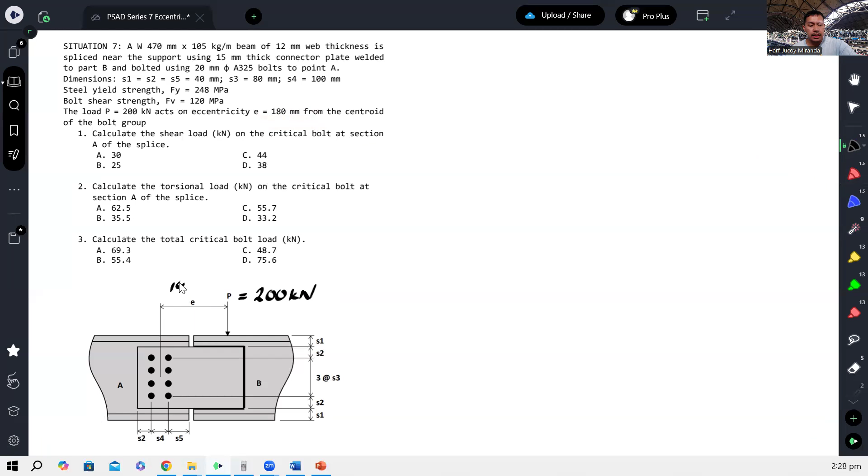Okay, so the load is 200 kilonewtons and then you are given eccentricity 180. So ito daw ay 200, and then this is 180 millimeters.

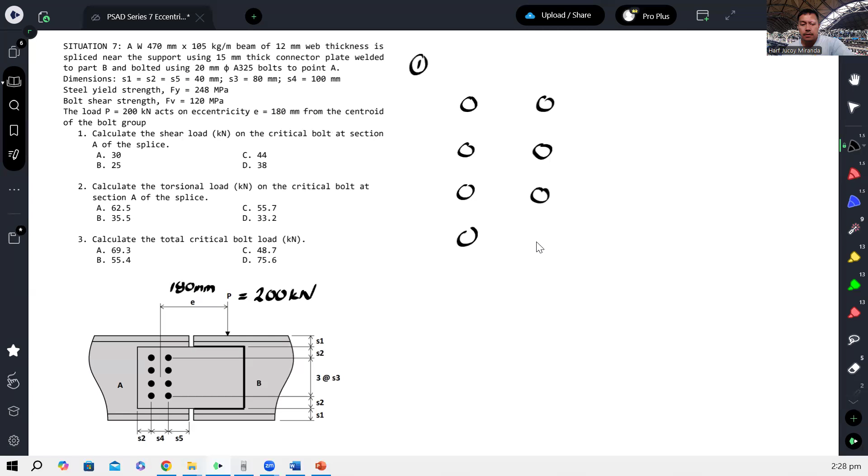Okay, so tinatanong ano yung shear load. So for number 1, madali lang yan. Okay, so di ba alam natin na yung mga bolts natin, due to the applied force, P equal to 200 kilonewton. Okay, so ito yung 200 kilonewton na is paghahatian basically nitong mga bolts na to.

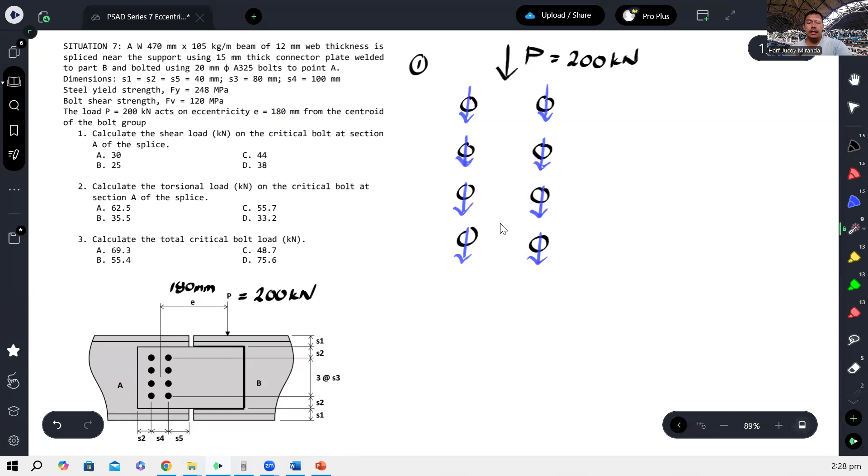Okay, so ang pinapakita ko na direction ng arrow is yung effect ng plate dun sa bolt. Hindi yan yung reaction ng bolt. Kasi kung reaction ng bolt yan, baliktad. Pero ang pinapakita ko is yung effect nung plate dun sa bolt. Kasi di ba pag tinulak mo ito pababa, yung plate babangga dun sa bolt eh. So ano lang to, effect ng plate. Kumbaga yan yung equivalent force na pinapasa ng plate, at basically yan yung hinahanap sa atin.

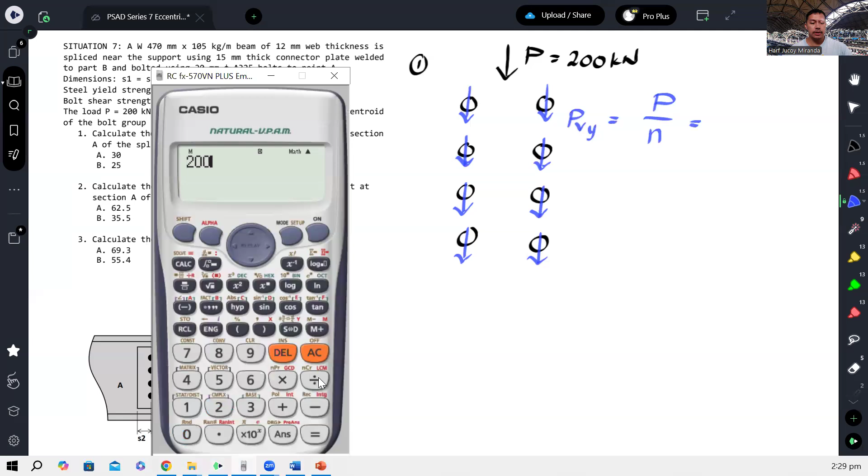Tawagin natin na PVY, kasi nasa Y direction. So to calculate that, that is simply kung ano yung P, divide mo lang kung ilan sila. So 200 divided by ilan ba 'to? 8. So 200 over 8, that gives us 25 kilonewtons each. And that's already our answer for number 1. Ganun lang kasimple.

Now, next, number 2. Determine the torsional load on the critical bolt at the section A. So, by the way, ito nga pala yung section A. Ito, bali ito yung tinutukoy niya.

Okay, so dito, kailangan ma-identify muna natin at the beginning kung alin yung most critical bolt. So, kapag eccentrically loaded na bolted connection, ang tatandaan natin is yung most critical bolt is letter A, farthest from the bolt group centroid, okay, and at the same time, nearest from the line of action of the force.

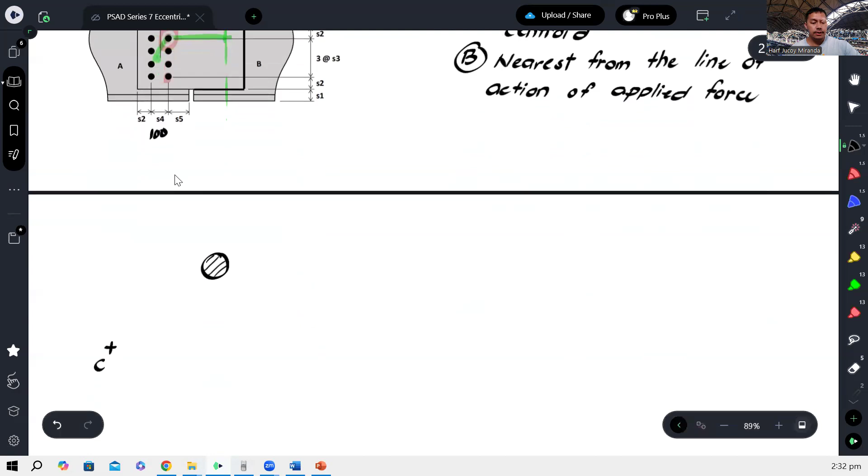Okay, so ibig sabihin, ito na lang yung i-analyze natin, ito nasa taas. So we have that bolt, ito kunwari yung bolt na yun, tapos ito kunwari yung centroid ng bolt group. So gano'n yan kalayo. According to the problem, yung S4 daw ay 100. So ibig sabihin, kung 100 ito, yung gitna niyan, 50, so 50 ito. This is 50 millimeters.

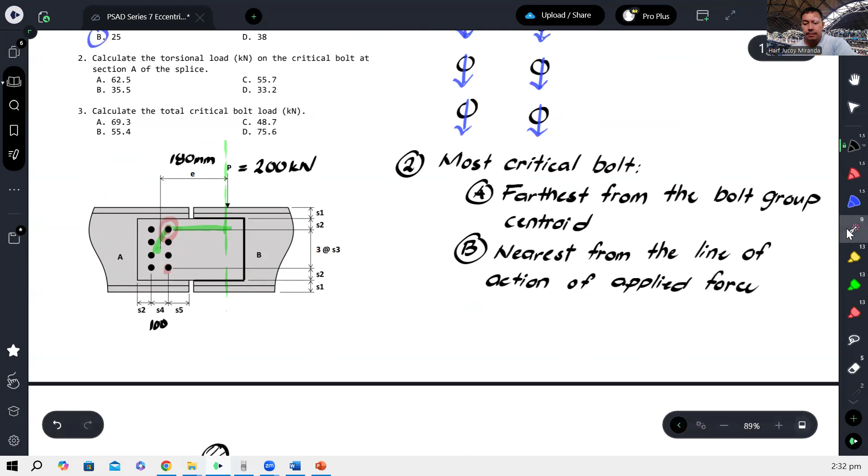Tapos, according to the problem, ito daw ay 3 times S3. So ang sukat nito, vertically, tatlong S3. Ang S3 naman is 80, so tatlong 80. Dito ko na drawing, ito yung tatlong 80. Take note, ito yung ina-analyze natin na bolt. Di ba ito yung centroid niyan sa gitna, so ito kalahati ng 80, so 40 ito plus 80, a total of 120. So ang distansya naman is 120 millimeters.

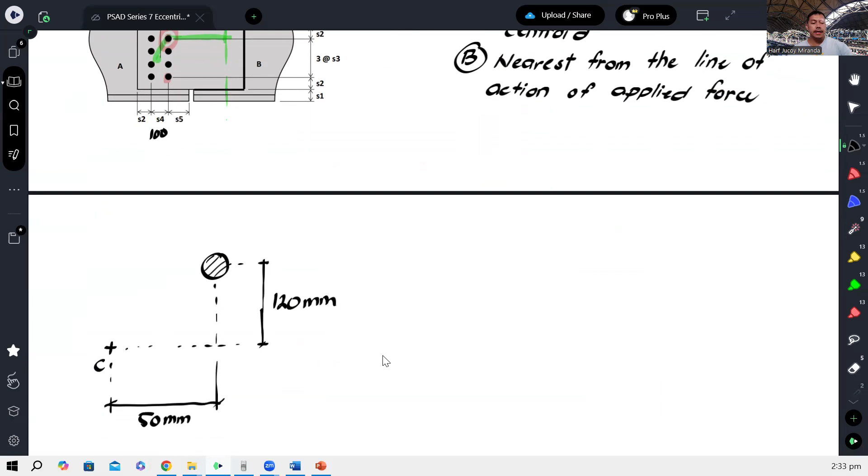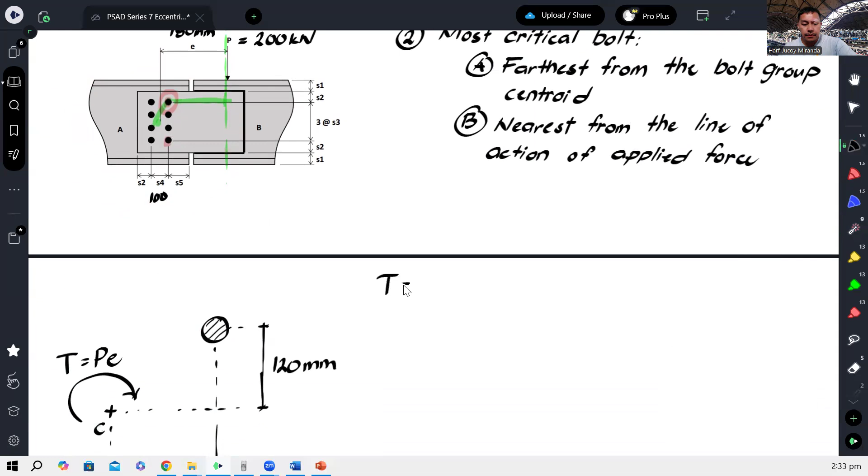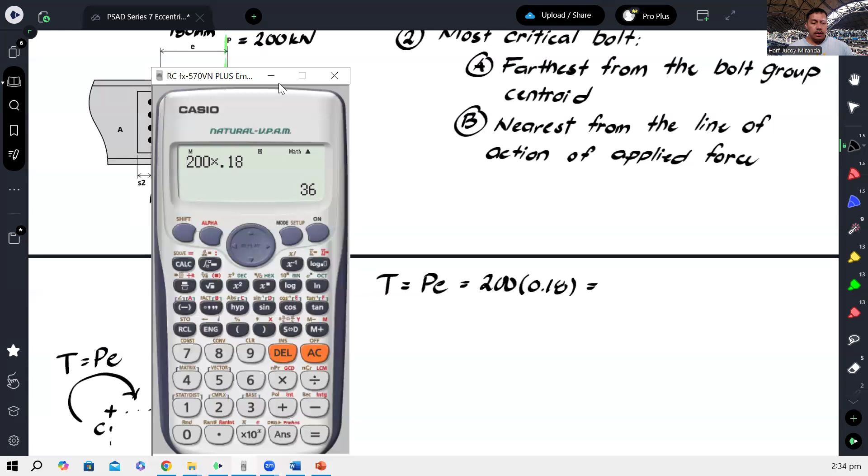So, because of the eccentricity, this force will produce a torsional moment at the centroid of the bolt group. Equal lang yan sa P times E. Yung direction of the torsional moment is due to the fact that downward ito, so yung rotation na ipoproduce niya at the centroid is also clockwise. Okay, so pwede na natin computin dito yung torsional moment: PE, that is 200 times 0.18, gives us 36 kilonewton meter. That is the torsional moment produced by the eccentrically loaded force.

Now, of course, because of this torsion, magkakaroon na ngayon ng effect naman. Ang palaging effect niyan is dapat perpendicular dun sa radius. So ito yung radius niya, and ang direction ng effect niya is ganito, perpendicular. So yung effect na yon is ganito.

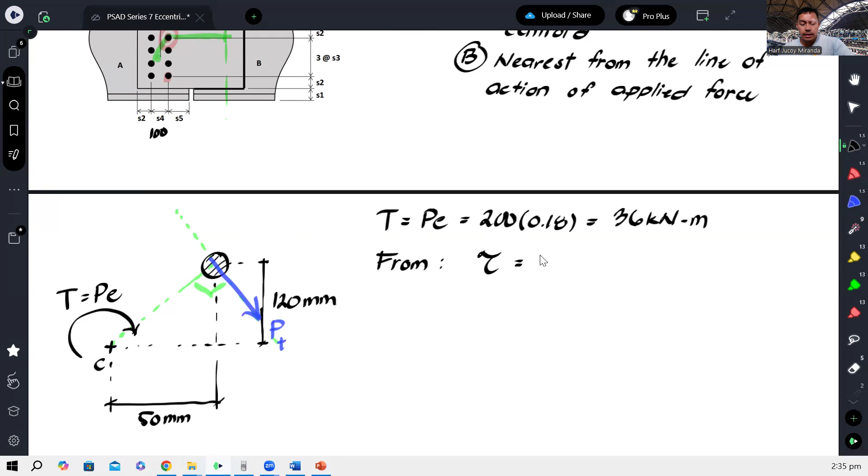If we recall, this J is just area times the summation of x squared plus y squared. Since the area is the same for all bolts (same diameter), we can factor out the area. If we cross-multiply, shear stress times area equals T rho over, and I'll call this small letter j since we removed the area.

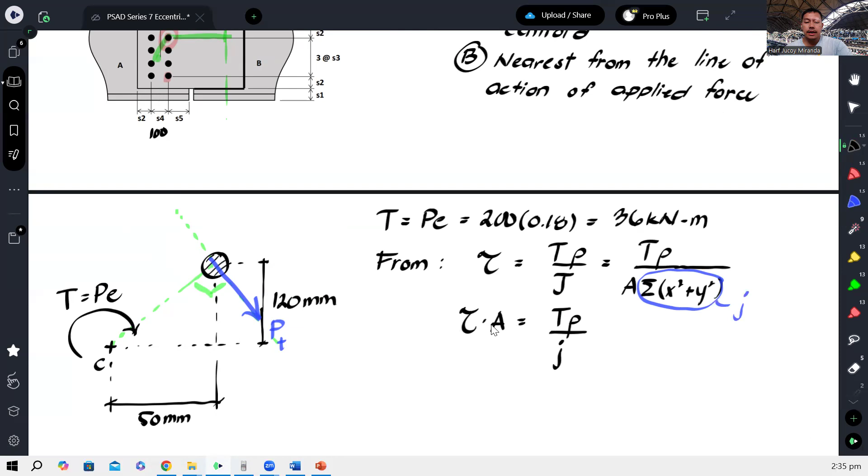So stress times area becomes force. That's now the force due to torsion. So that's the formula, T rho over J, where J is just the summation of x squared plus y squared.

So if we apply this formula directly, we get 36 kilonewton meter, multiplied by 1 million to convert to newton millimeter. Then for rho, that's the direct perpendicular distance, which is square root of 120 squared plus 50 squared.

Let me just write rho over J here. And this J is the summation of all the x squared and y squared.

So what does that mean? The x here is the distance from the centroid for each bolt. This is the x distance for this bolt, and the same x for this one. Actually all of them have the same x, equal to 50. So that's 50 squared.

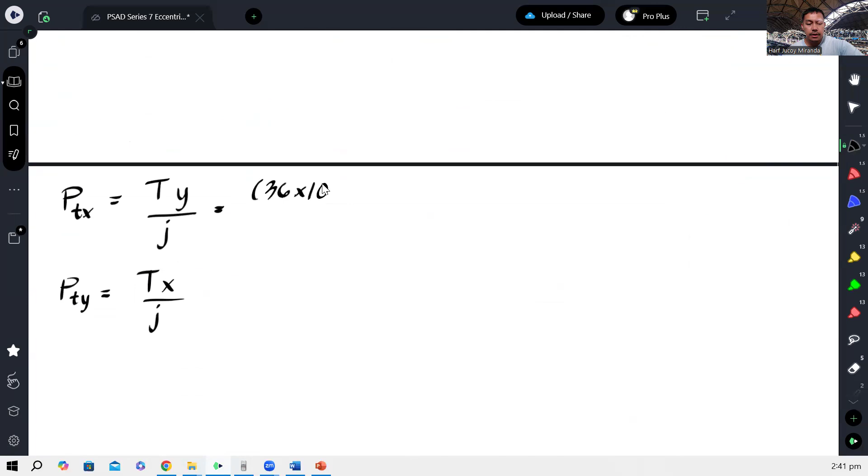This is 36 million, times our Y which is 120 millimeters, over J. For the other one, 36 million times our X which is 50, over J. If we compute that, we get 36 million times 120 over J, which I set up as A earlier, and converting to kilonewtons, that's 51.43.

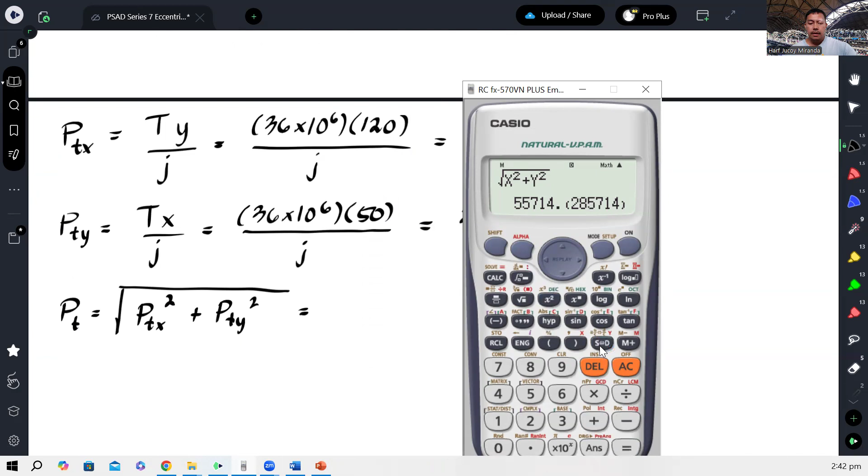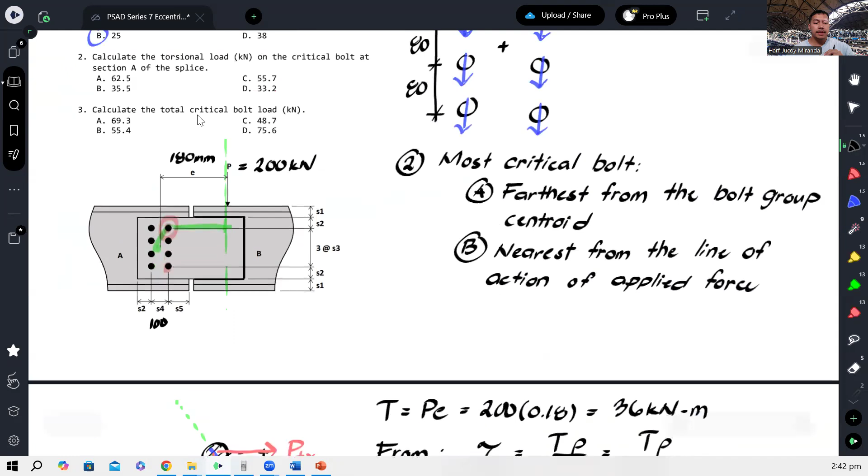55.71, so same lang. Again, kaya ako yung ginawa, para mamaya, doon sa huling question, para madali nating makombine yung mga forces acting on that bolt, para makuha yung total critical bolt load.

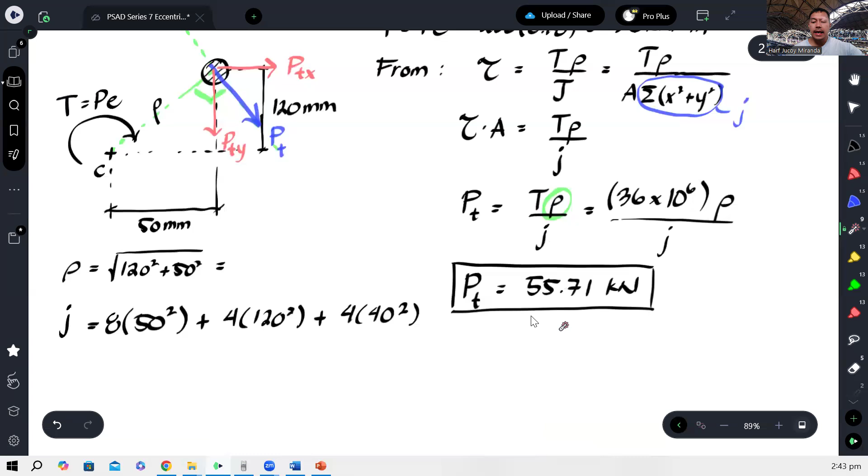Okay, so number 3. Pwede nyo naman to i-continue. Kung halimbawa, ang gusto yung kumpitin sa umpisa is yung total, after nyan, kailangan mo siyang i-resolve into components.

Okay, because this is to be combined with yung PV, yung shear load na galing dun sa direct shear. So pwedeng total muna saka mo i-component, or component muna bago yung total. Okay, so paano i-component yan?

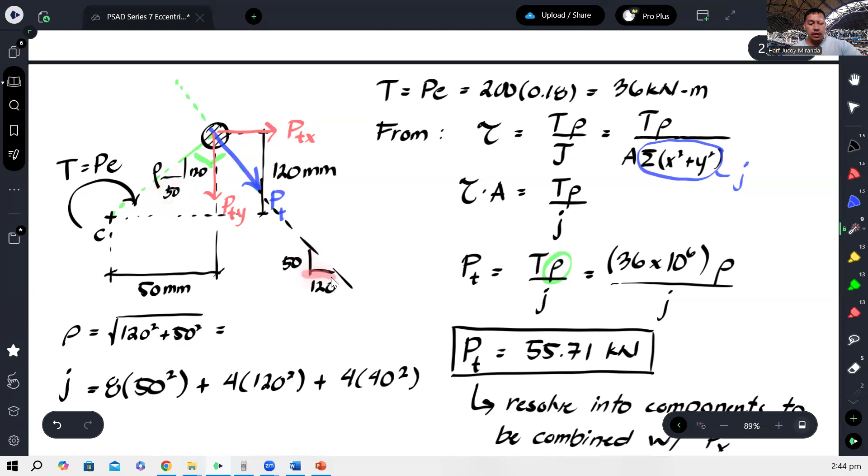Well, una, ang slope nito, pwede mong i-adapt yung 50 by 120. So ibig sabihin, ang slope nito, extend natin, baliktad, 50, 120. Bakit baliktad? Kasi perpendicular to eh. So kung ano man ang slope nito, yung slope ng perpendicular sa kanya, baliktad. Yung rise yung 50, yung run yung 120. Okay, tapos I think this is gonna give you 130 na hypotenuse.

Ayan, 130 na hypotenuse. Okay, so ibig sabihin, kapag kukumpitin mo yung PTX mula dyan, mumultiply mo lang yung PT ng X, so 120 over 130. Tapos yung PTY naman, mumultiply mo lang yung nakuha mo na PT ng 50 over 130.

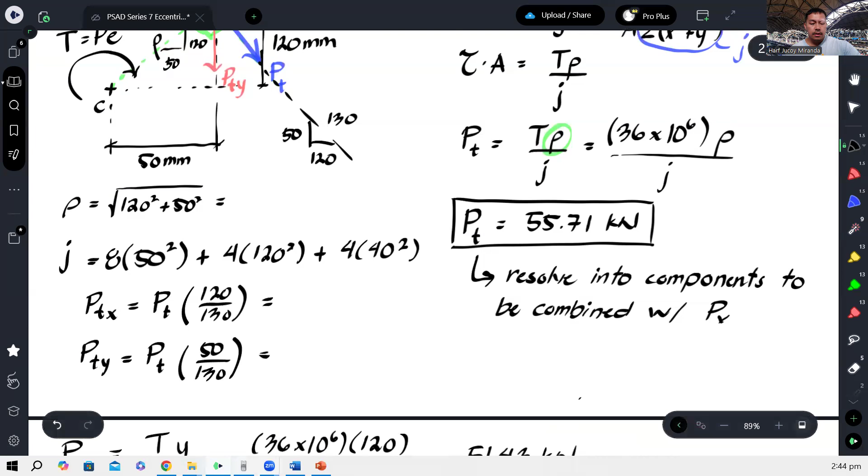Okay, and that gives you, so pakita ko lang ha. Saan ko ba nilagay yung kanina? Dito ba yan? Hindi ko sinave. Okay, pero pakita ko lang yung value, 55.71, pakita ko lang na parehas.

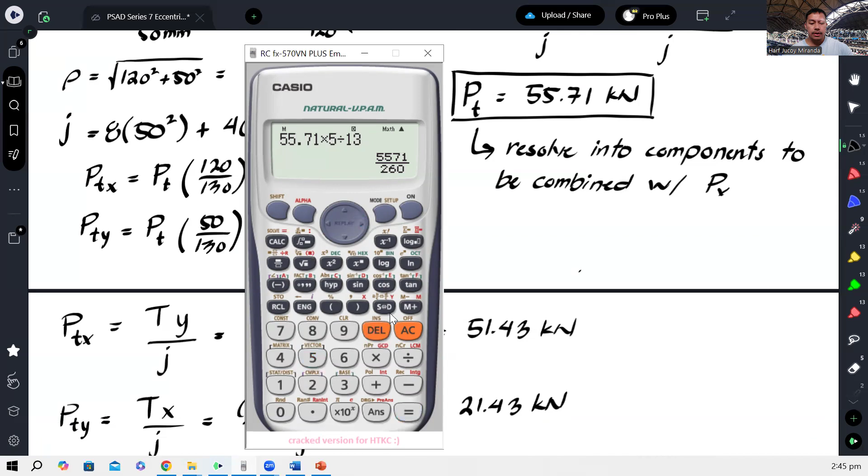Times 120 over 130, so 12 over 13 din yun. So ayan o, 51.43, ito. Tapos kung gagawin mo naman tong 5 para sa Y, ito naman yan, 21.43. Okay, so either ways, pwede mong ma-solve yung components.

Okay, so ngayon, i-combine na natin siya sa number 3. So again, ito yung bolt na pinag-uusapan natin, yung bolt A. Kanina, sabi natin, meron diyang nag-act na PVY na alam natin yung value. Ang value kanina ay 25 kilonewtons.

Okay, tapos ngayon, nakuha na natin yung components ng PTX at saka PTY. So ngayon, ang tanong, saan ba direction nun? So again, you have to be consistent. Kanina, nag-umpisa ako na ang ginamit ko na mga forces is yung transmitted force, hindi yung reaction force ng bolt. So ang transmitted force is downward kasi downward yung force na ina-apply. Okay, kaya itong PVY, nagiging downward.

Ngayon, doon naman sa torsion, ganun din. I was being consistent. Yung pinakita ko na drawing is yung transmitted force, hindi yung reactive force ng bolt. Kasi sa totoo lang, kung ang rotation mo ay ganito, malamang magre-react yung bolt mo in this direction, di ba? Pero reaction yan. Pwede naman na puro reaction yung i-drawing mo, yun nga lang, dapat mula umpisa, puro reaction din yung i-drawing mo. Okay, pero ako kasi naumpisahan ko na puro transmitted force, kaya puro transmitted force lang din yung dinrawing ko. Hindi pwedeng pagsamahin kasi magkakabali-baliktad yung direction ng force.

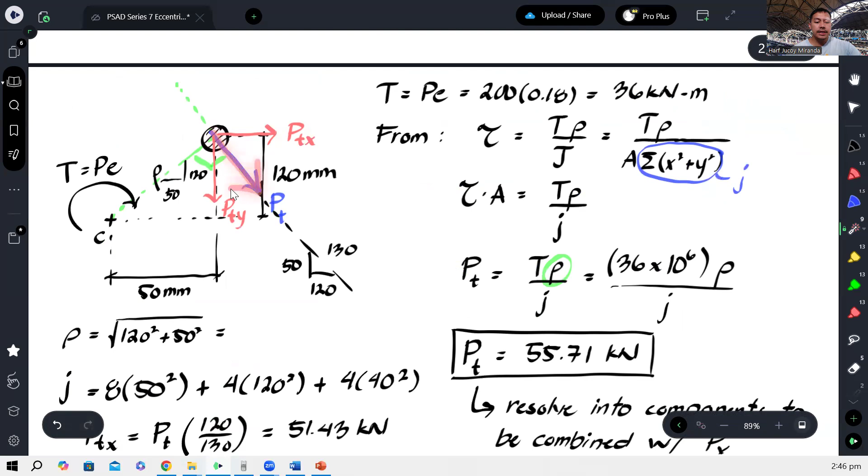Anyway, so dito mapapansin natin na dahil yung transmitted force is downward to the right, ibig sabihin yung PTX mo ay to the right, tapos yung PTY mo downward din. Okay, so meron tayo ditong PTY na downward, and meron tayong X na to the right. So this is 51.43 and this is 21.43. Okay, so sa number 3, we would be able to calculate now yung resultant niyan.

Kumbaga yung resultant niyan, R, will just be equal to, so syempre, i-add natin tong dalawa para makuha yung Ry. Okay, tapos yung Rx, ito na rin yun, yung PTX lang, kasi wala namang ibang force na nandoon.

Okay, so therefore, yung total load will be the square root of PTX squared plus PVY plus PTY squared. Okay, and therefore, that would be equal to 51.43 squared plus 25 plus 21.43 squared. Okay, and that gives us 69.29 kilonewtons. So yan ngayon yung total load kapag combined yung direct shear at saka yung torsional shear.

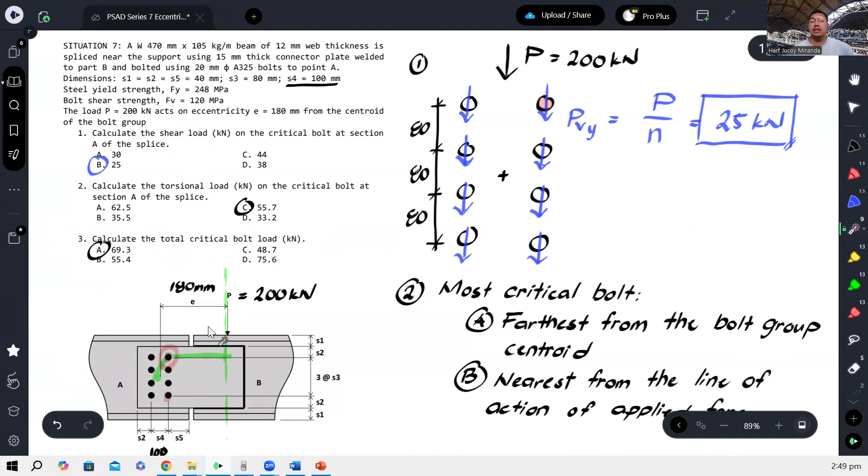Okay, so ngayon dito, so ang sagot natin ay 55.7 tsaka 69.3. Okay, so ngayon dito, may papakita ako ng method na kung saan, halimbawa, hindi naman talaga tinatanong yung shear load at saka yung torsional load. Kumbaga, kailangan mo na kagad itong total critical load sa bolt. Okay, so kumbaga, sort of like shortcut. Kasi may mga problem na ipapa-analyze sa inyo yung shear stress doon sa bolt, which is kailangan yung total yun. So paano gagawin? Dito pa papasok yung tinatawag natin na instantaneous center.

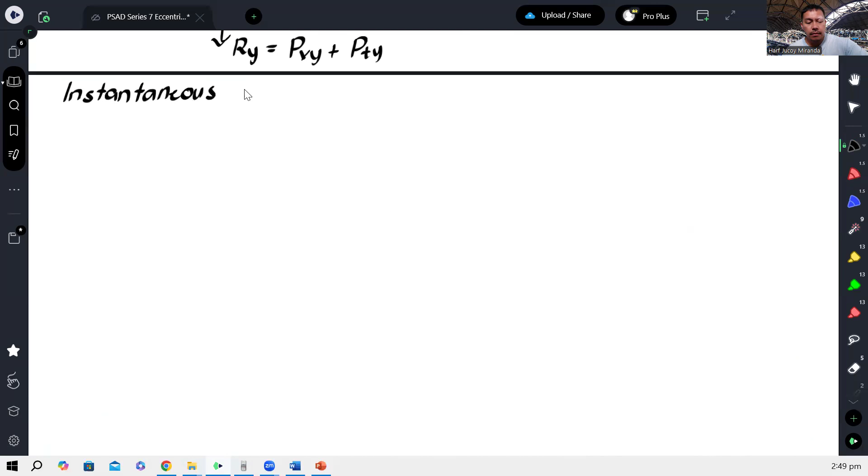Okay, so this is the point where the force due to shear is equal to the force due to torsion. There's a point somewhere where the two are equal. And let's say this is our bolted group.

So here we have the force P at an eccentricity E, and this is the centroid of the bolt group. There's an instantaneous center that's always found away from the applied force. So somewhere here - let's say this is the instantaneous center.

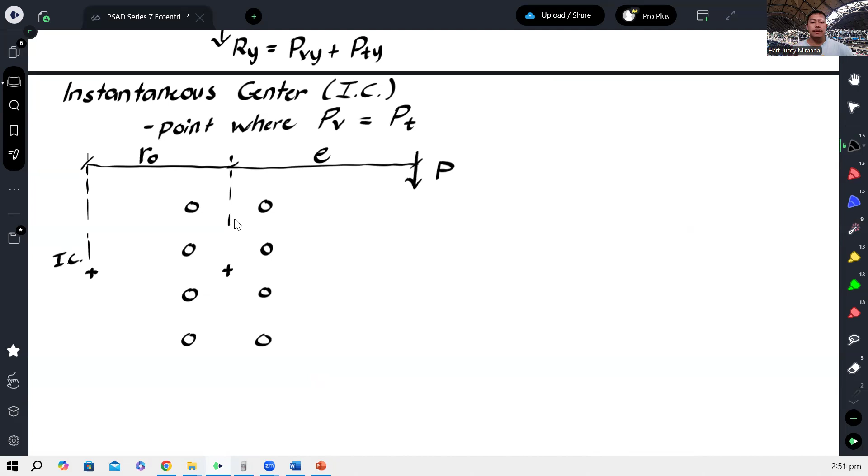So again, the instantaneous center is always found away from the applied load, at a distance RO from the bolt group centroid. So how do we calculate for RO?

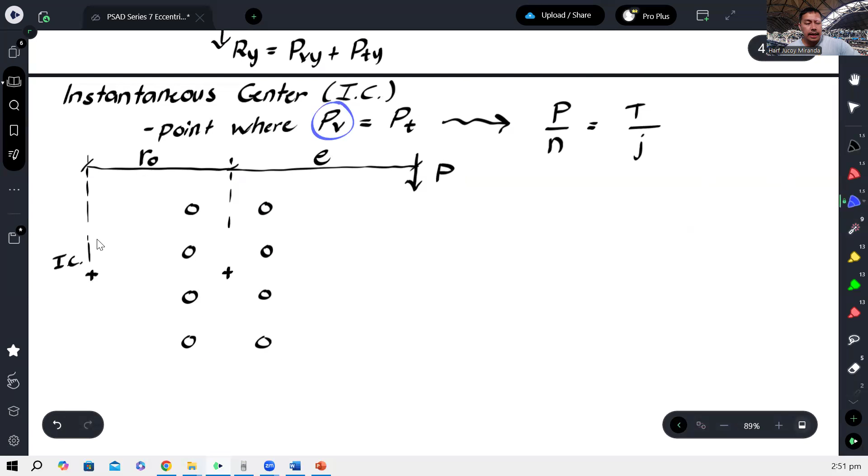Let's use this: PV we computed as the applied force divided by the number of bolts. Then PT we defined as T rho over J. So the rho we'll use technically is this RO, since this PV acts here and this PT also acts here - so our rho should be this distance, which is RO.

And then T was computed as force times eccentricity. So here the P cancels out, and from here we can solve for RO. When you solve it, you get J times, divided by E, so NE. This is now the formula for the location of the instantaneous center.

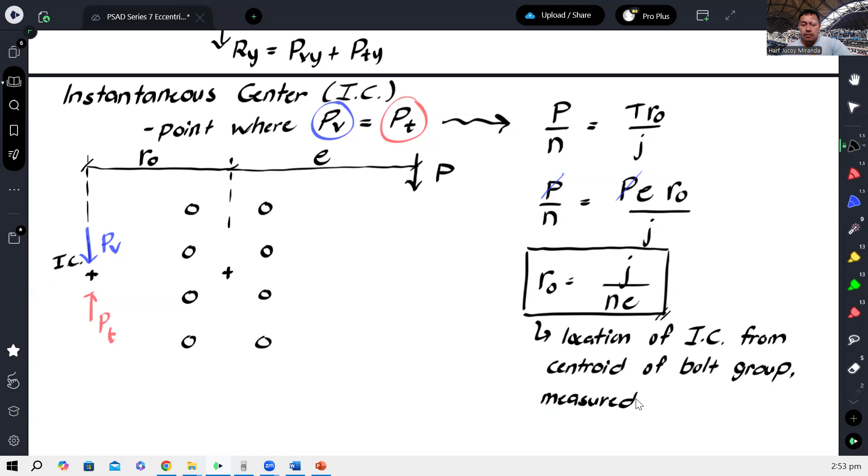Measured from the centroid of the bolt group, measured away from or opposite the line of action of the load.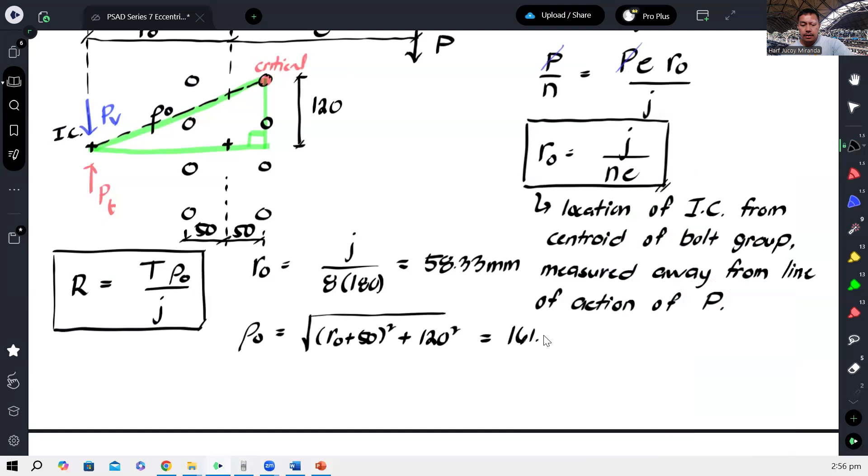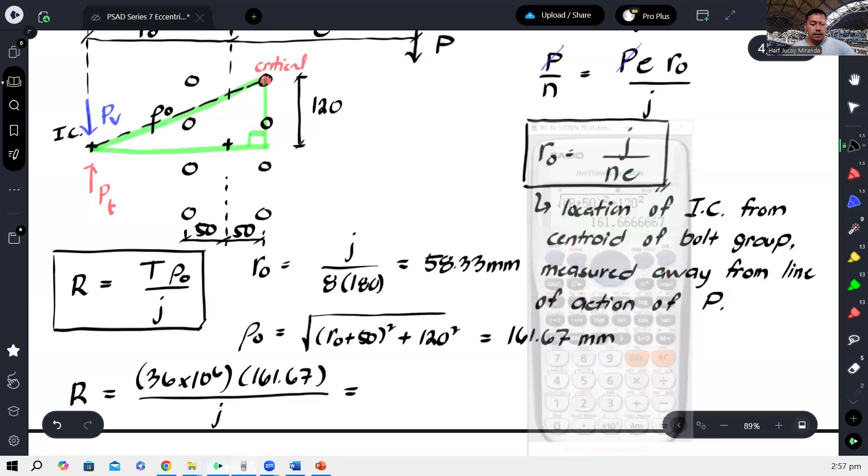That gives me 161.67 millimeters. Now that I have rho O, I can compute the reaction. Our T was 36 million, so R equals 36 million times 161.67 over J, which gives us 69.29 kilonewtons.

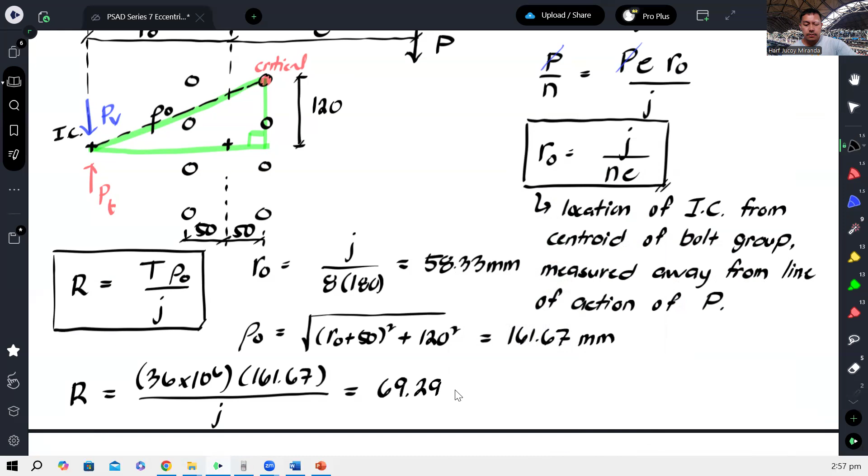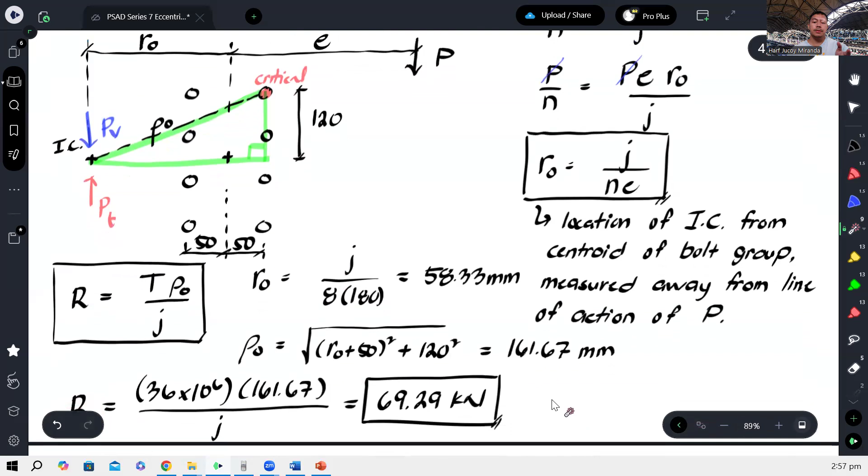Same answer as our earlier computation. So that's how you utilize the instantaneous center - it's much faster, especially if that's what you need to compute directly. But for this problem, it's still better to go through the full steps since they're asked in the problem. But for cases where you need to solve for R directly, you can use this method.